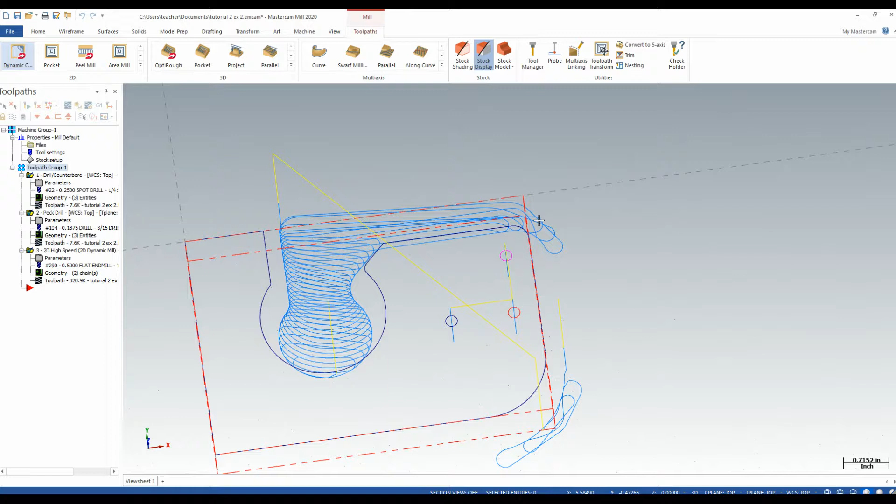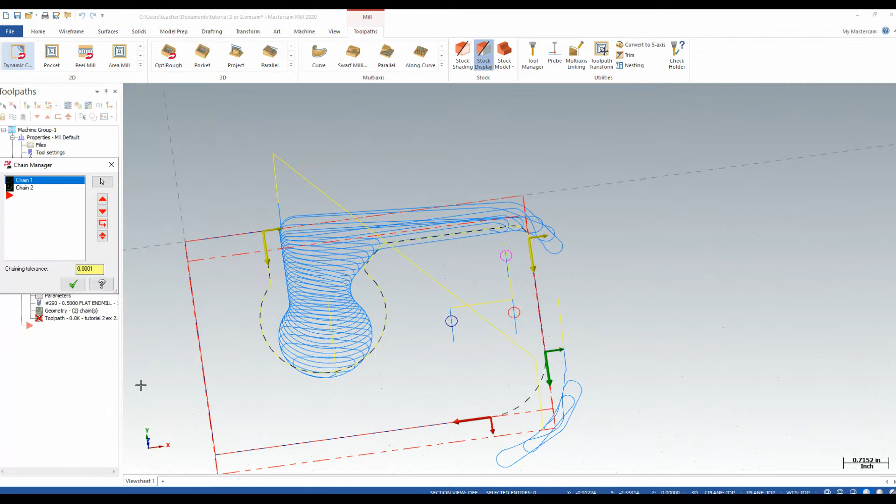From here, what I'm going to do is I'm going to go and add that dynamic contour. So I choose dynamic contour, machining regions. Again, we're using partial chains because we have open areas. I'm going to start here and exit here. I'm going to add another one to get this last corner, add a chain, and I chose right click to add the chain here. Once I have finished, up comes a dynamic contour box.

I'm going to use the same 1/2 inch flat end mill, 5,100 RPM for aluminum, chip load of 0.001. The tool itself will take a heavier chip load. However, as I explained before, our machine will not take that heavy of a chip load. For this, because we're only taking 10,000ths off, I could chip load it much more, but I want a nice quality finish on here.

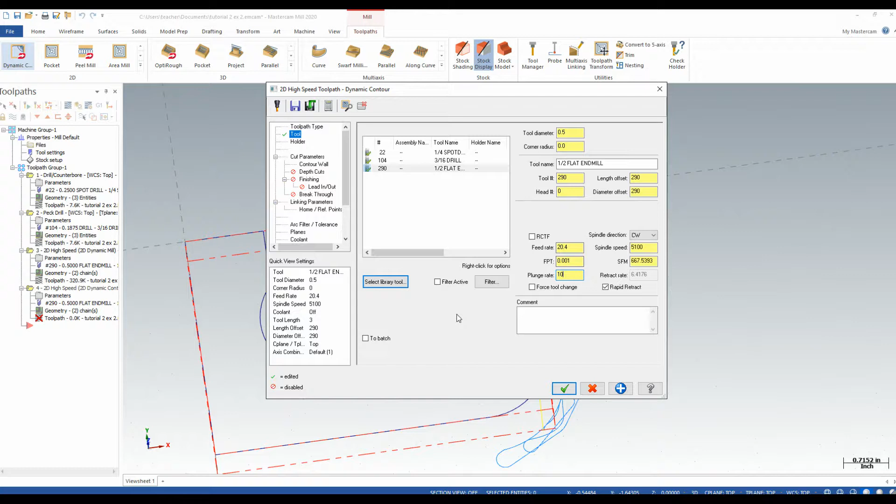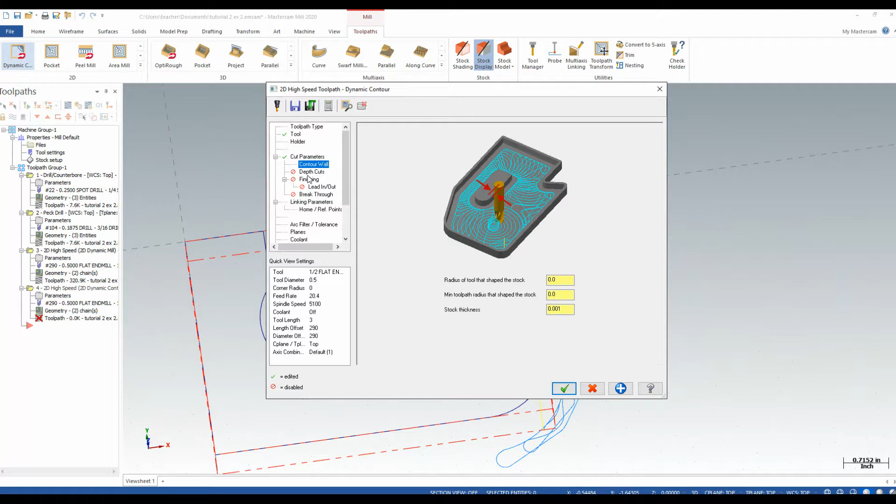Cut parameters. We want no material left. Step over, we're not worried about. If I was worried about step over, maybe I had machined with a really large tool at first, I could add in my step over here, especially if I was using a smaller tool. Contour on the walls, we previously machined this with the same tool, so we are not worried about any values here. We're not worried about depth cuts. The cutting length of our 1/2 inch flat end mill is 1 inch. We're only going 0.75 deep.

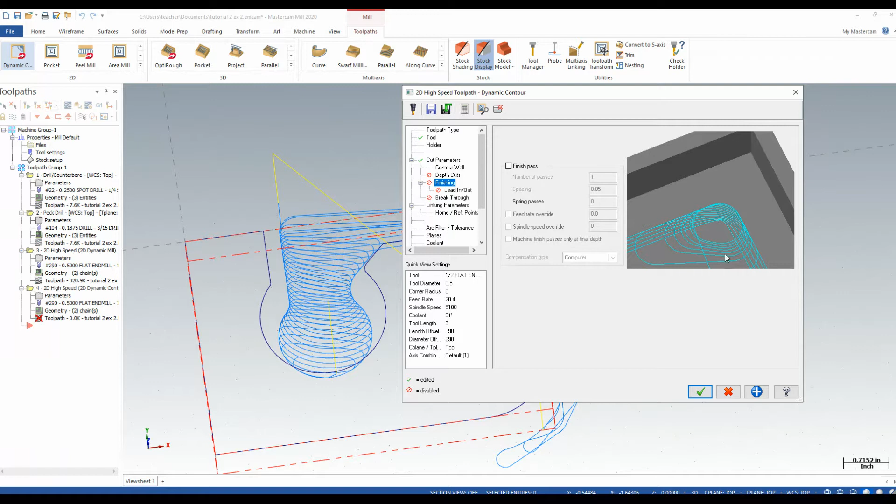Finishing. We are cleaning up a previous operation, so I'm not worried about finishing here as well. Lead in, lead out. If you want it, you need to turn finishing on. That will give you an extra pass. But the nice thing about dynamic contours is they will start outside of the material anyway and give a nice smooth transition in. The other benefit of dynamic contours, let's say it was machining an internal contour, areas like this corner, you would add tool passes in, as you see here, to make it more efficient in clearing out that material. I do want to add a breakthrough of 5,000ths.

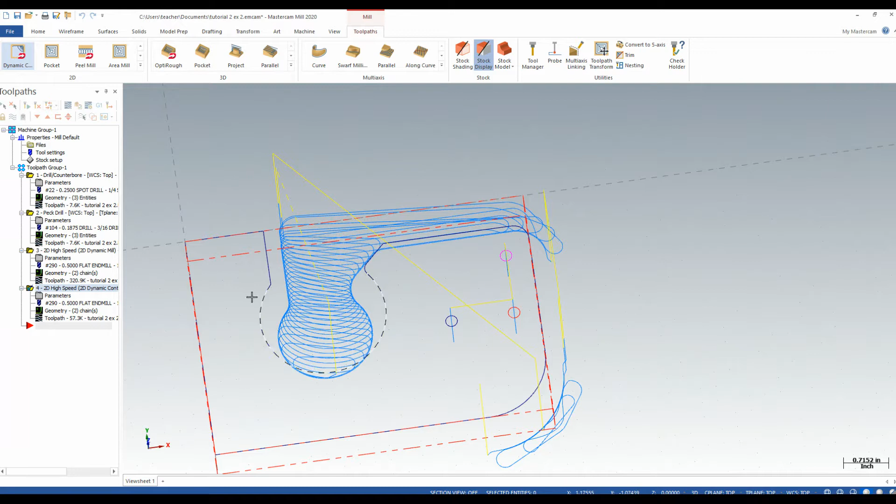And I do want to make sure my retract is set to 2 to clear that clamp that we talked about using. We're going to go negative 0.75 deep. And when I complete the operation, let me turn everything off except that, we see it comes in, sweeps into this area here, finishes its contour, exits, comes way up to clear that clamp that we would put in, and then sweeps back in to finish that area.

We had an optional stop after the peck drill cycle to add in a clamp. And the reason for that, if I only clamped here and here, maybe here, here, and here, this would vibrate a lot. It would all not be held down. So by adding a clamp into this area, we create a very secure hold down by simply breaking up our operations. No need for multiple posts. The machine will stop after the peck drill until the operator tells it to begin again.